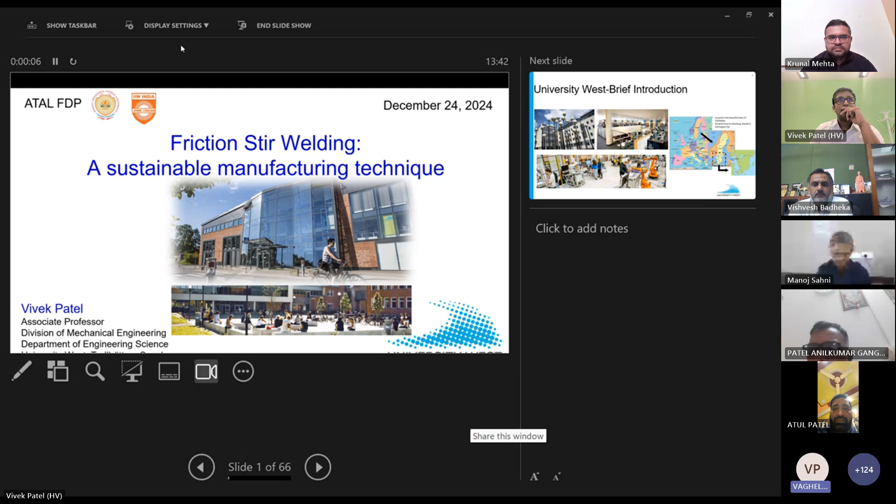Just a second. Okay, and I will share. So can you see the presentation? We can see your Teams, sir, not the presentation. Just give me a second. Now can you see my screen? Yes, sir, it's visible. I have to remove this one, right? Shall I start, sir? Please, sir. So thank you for this opportunity, and I will try to talk about friction stir welding. I think I should be talking for 1 hour, right, sir? Or what is the time limit? Yes, sir, maybe 1 hour, 15 minutes is also fine. Yes, sir, thank you.

First I will give you a brief introduction from where I come. I come from University West in Sweden, located near the second largest city of Sweden, that is Gothenburg. When it comes to education, the university deals with all cycles, starting from bachelor's, where we have programs in mechanical, automation, and industrial engineering. We also have programs at the second cycle of education, that is master's, mainly in manufacturing, welding, and robotics. For artificial intelligence and automation, these are recent programs we started in the last couple of years. We also provide PhD education, the last cycle, and do industry-driven research in our research environment.

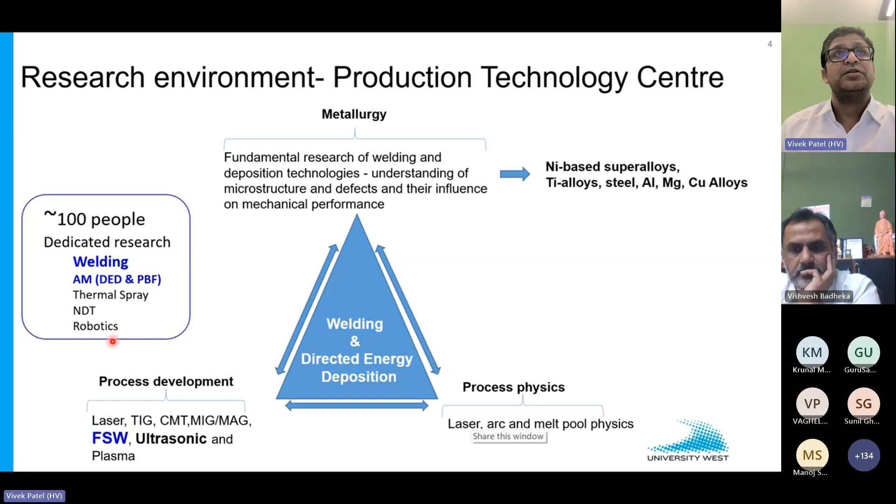In comes the division of welding from where I come. These are the infrastructure for the welding processes, and we also do in-house material testing through mechanical properties and microstructure correlations.

So that was the introduction, let's begin today's session. Before we go to friction stir welding, I'd like to start with welding basics. As you can see on the left of the screen, everyone knows what welding is. Basically, welding is joining of two or more components together. We apply a heat source to the joint where we want to combine more than one material, and several joint configurations are possible. I've put the basic joint configurations, especially for structural applications.

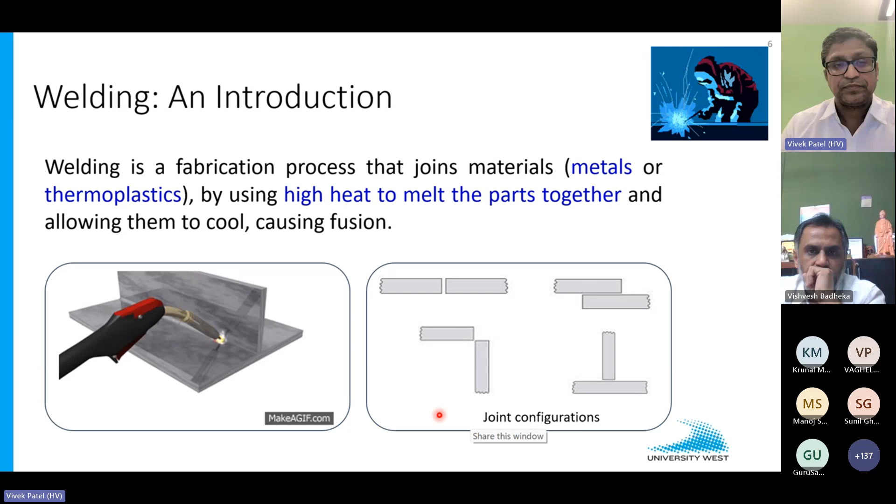You see fusion joining, that's laser welding and arc welding. In arc welding, there are a lot of applications by MIG and TIG. Then mechanical joining, so you have a lot of fasteners and rivetings. Then hybrid joining, some chemical joining, and solid state joining over here. That's what we are going to talk about today.

If we look at solid state joining, gradually the solid state welding is replacing some joining techniques in the automotive industry, and especially now the entire automotive industry is shifting toward electrification. We all know how big electric vehicles are crucial for the future, so there are a lot of applications of friction stir welding when it comes to electric vehicles, whether fully electric or hybrid. There's a significant share of friction stir welding now, and we work on process development for OEMs, meaning original equipment manufacturers.

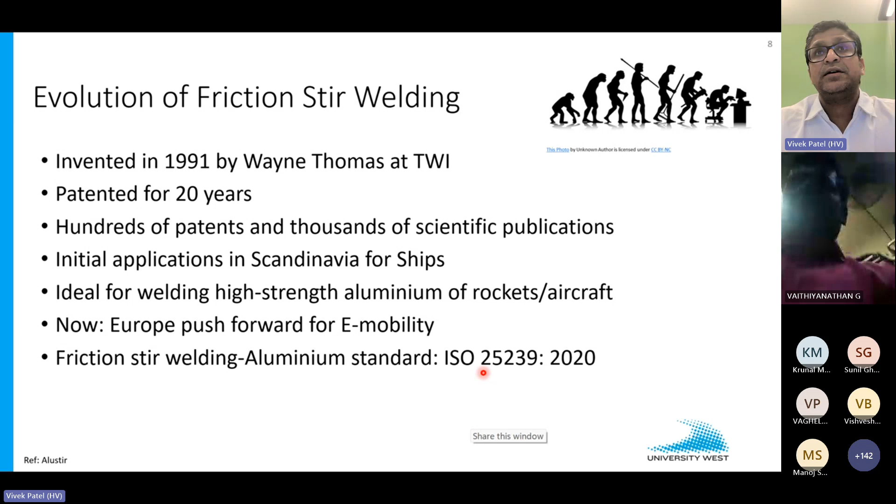But now, in the last couple of years, and for the next 5 to 10 years, there is a lot of push for friction stir welding for e-mobility, for electric vehicles. We see significant push for this technology for joining different applications in the automotive industry, and the automotive industries are willing to accept it because now the ISO standard is available when it comes to process qualification. The ISO standard was recently published with two revisions, allowing companies to implement this technology so they can qualify the process based on the ISO standard. So this is how the process has evolved so far.

Now, what is friction stir welding? The friction stir welding is a solid state process. So here there is no fusion of material. You don't melt the material basically.

So we don't see any fumes and we don't need any filler material. You don't need any shielding gas when it comes to the welding of aluminum. So basically, it's a clean process. You don't need surface preparation either.

If we categorize this welding process, it's solid state, so you work less than 90% of the melting point of the material, and the energy source is completely mechanical force. You apply a significant amount of force downward, and the force varies from material to material and from thickness to thickness of what you want to weld. The heat source or thermal source is nothing but the friction between the tool and the workpiece.

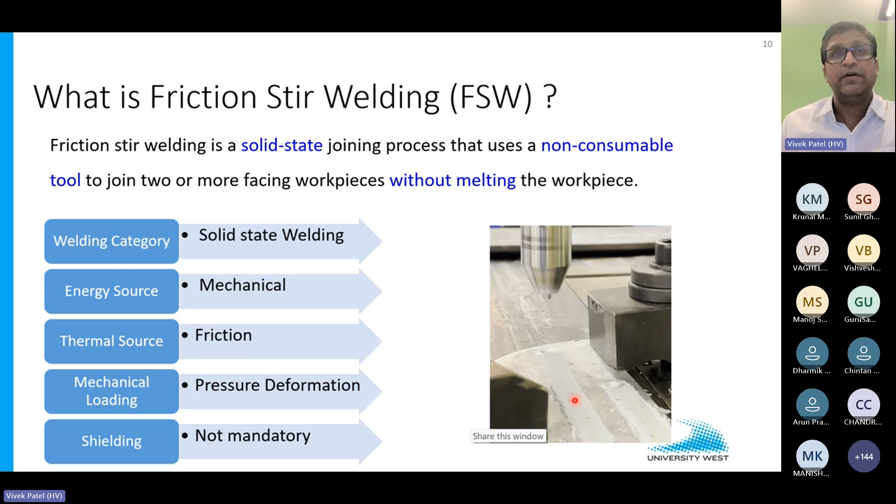The mechanical loading is the pressure applied by the tool surface, the probe and the shoulder, which we will see in the next slide. The shielding is not mandatory, especially for aluminum alloys. So I would say you save a lot of resources when it comes to mass production.

Let's try to understand with some basic illustration of the process. The friction stir welding working principle is understood through 4 steps. But before we go to the 4 steps, let's understand what you need if you want to do friction stir welding. First, you need a backing bar or significant amount of rigid support.

You can see that's nothing but the table, or the backing bar you need. The second thing is a tool, and the tool is nothing but the heart of the process. The tool has a shoulder, which is the larger diameter, and the probe, which is the smaller diameter. This tool is driven through rotational energy, clockwise or anti-clockwise, depending on the setup.

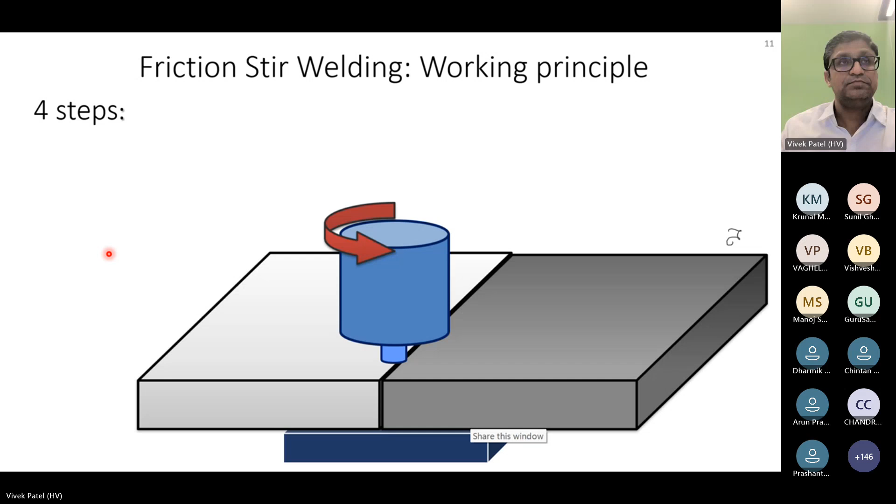This is the example of a butt joint. You have one part and a second part, and these parts are to be welded. The first step is the plunging: the tool makes contact with the workpiece and you wait a certain time. That's called dwelling, and the dwelling time depends on what temperature you want to weld.

Once the temperature is reached, you start taking the tool off in the welding direction. So the second step is welding, where the tool is moved along the welding path.

While the tool is moving, you see that this surface is developed, and this surface is nothing but the footprint of the bigger diameter of the tool, that is your shoulder. The footprint of the smaller diameter cannot be seen with the naked eye here; it is visible in the cross section of the weld.

Then the fourth step is dwelling or retracting, and you can see that you end up with a keyhole.

Now looking at the process parameters, how the process is controlled or governed: once you have the right dimension of the tool, the process temperature, or heat input, is controlled by three key parameters. The first one is rotational speed. Higher the rotation speed, more the friction, so you generate more heat.

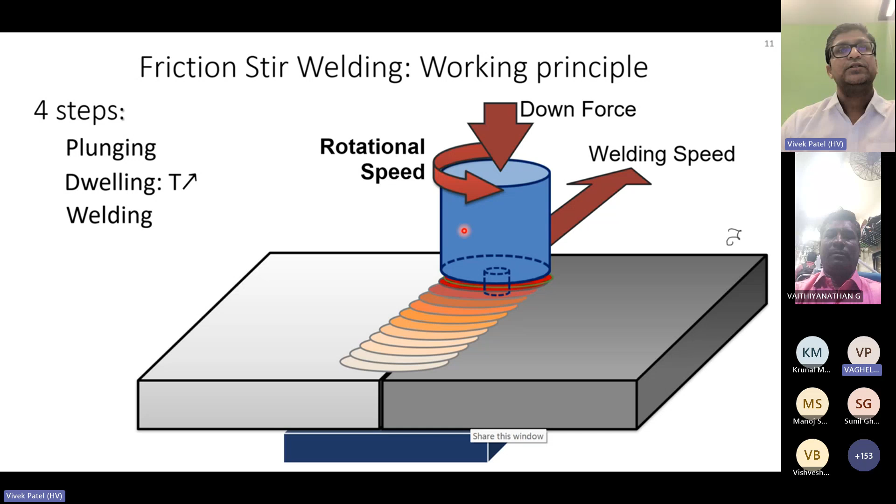The last parameter is welding speed, which provides the production volume or productivity. Welding speed is very crucial in automotive industries, where production volume counts on a fingertip 24/7. By playing with these three variables, you can decide the right weld surface and weld performance through detailed testing and characterization.

Now, next question: when it comes to material, what materials can friction stir welding weld?

So the materials that can be welded by friction stir welding - most metals can be welded, and we start with aluminum. There's significant evidence for aluminum. All aluminum alloys, from pure aluminum to the highest strength aluminum, can be welded by friction stir welding. And luckily, we have the ISO standard for aluminum friction stir welding, so there's no doubt for putting it into production and running components, whether in the lab or on road, in shipbuilding or aerospace.

Magnesium is also quite evident. We find a lot of research articles and space applications now where magnesium alloys are welded by friction stir welding. Copper, of course, is mature too. But for welding copper, the tool material plays a significant role, so you should have a different tool material when welding aluminum versus copper.

Steel and titanium, I would say, are the new topic or new materials being investigated right now in friction stir welding. These two materials are basically harder compared to the top three materials, and because of that, the tool material needs to be even harder. So there is now significant advancement on tool material for welding steel and titanium, and it looks promising. We will see friction stir welding of steel and titanium just like what is happening in aluminum and magnesium at the moment.

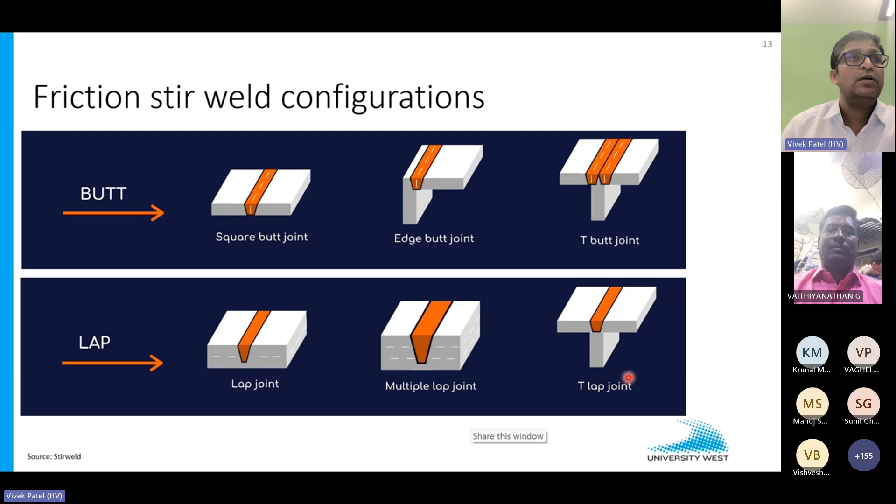And of course, nowadays, because of fixtures and tooling, T-lap joints are also possible. So it can take care of different weld configurations, which provides a lot of freedom to the designer for designing the component.

Every manufacturing process has defects - it's all about how you can tackle, minimize, and eliminate those defects. In friction stir welding, the defects you can see from the naked eye include flash on the surface - you can see in the picture, one example of flashes. This is a defect, but it can be tackled by post-welding treatment like deburring or machining, though that's not the ideal case. This defect is basically a result of a higher heat input condition, which we call a hot welding condition.

On the other side, you have some tunnel defects on the surface that you can see with the naked eye during the process - you can see this in the actual picture. This could be the result of a cold defect, or I would say cold heat input process variables.

Then there are defects you can't see from the surface that require a microscope to see from the cross section - that's a lack of penetration. You can see it here; it's quite common in the case of butt welds.

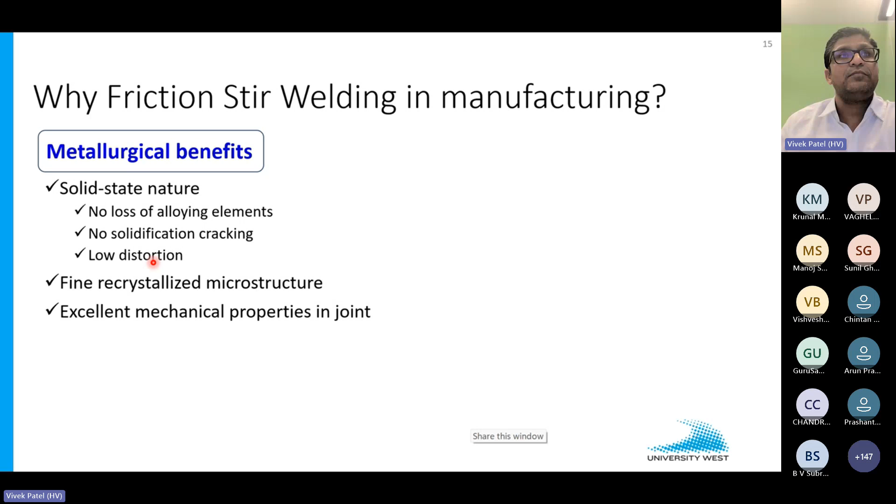There is no melting, so you get rid of solidification cracking. And due to the lower working temperature, you end up with minimum distortion. And due to the plastic deformation, you get a very fine recrystallized microstructure.

Here you can see this EBSD map of 7000 grade aluminum, 7075 T6 condition. This is the parent material, and after the weld, if you see the weld nugget, this much amount of grain refinement you can achieve. This grain refinement happens from these elongated pancake grains of rolling to fine equiaxed grains, because of the plastic deformation. There is severe plastic deformation happening during the process, and that gives you the fine structure.

This fine structure basically helps to gain some properties in the nugget, and ultimately you have a stronger joint. So that fine structure contributes to the mechanical properties. When we talk about mechanical properties at room temperature in a static way, the static tensile strength, the joint always fails either from the heat affected zone or from the parent material itself. So this process gives almost 90 to 95% of joint strength. In terms of mechanical properties, friction stir welding guarantees better strength compared to fusion joining methods.

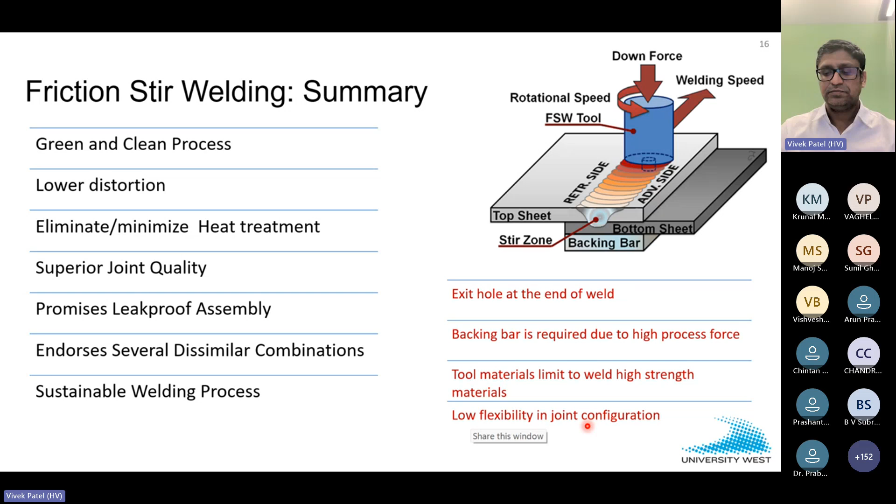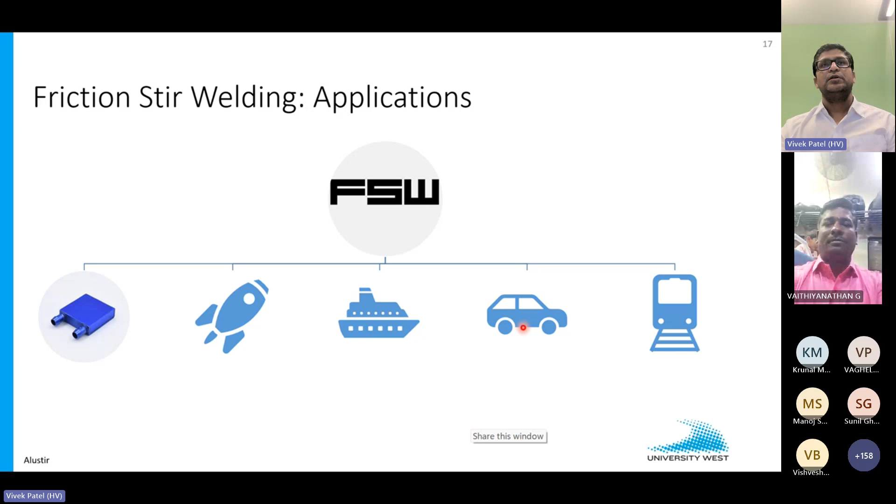So, the applications. I try to put the different applications of friction stir welding, starting from electronics, then aerospace, shipbuilding, automotives, and railway industries.

Let's start with electronics. Friction stir welding is being used for developing enclosures for circuits, especially for electric vehicles, and is quite prominent for making thermal management systems or cooling plates. You can see here some pictures of cooling plates for one electric vehicle component.

And almost 12 years ago, friction stir welding was introduced for welding the MacBook aluminum panel. That was one of the applications investigated and implemented to weld the back and front panel of a MacBook to make it more lightweight and robust.

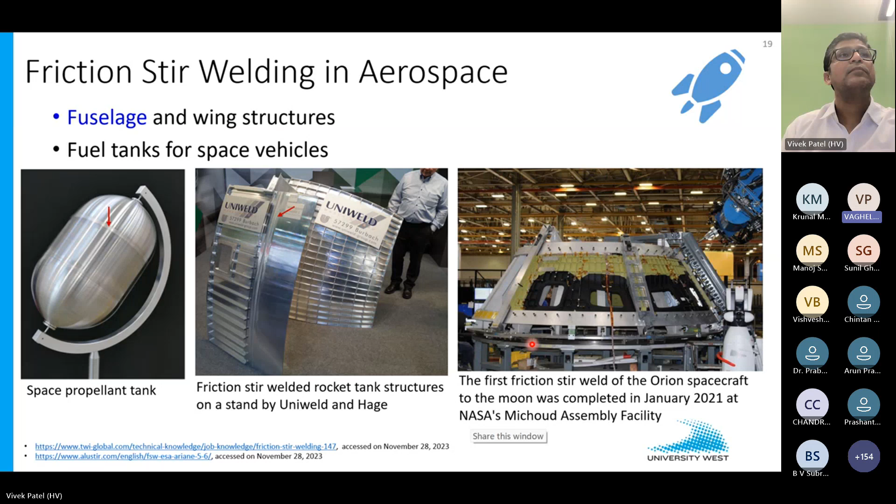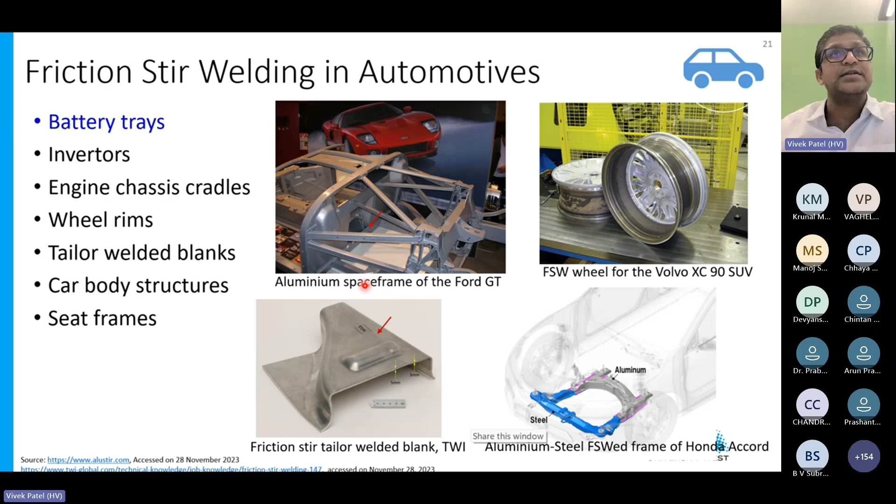Now I will try to give you more insights on friction stir welding, and I'll share some of the methods we follow at University West in terms of novelty, helping the companies nearby in Sweden.

So what we have done so far, a few PhD graduates have developed the temperature and force control robotic system. We developed a system that can be controlled through temperature. We control this process through temperature measurements, where we don't insert the thermocouple into the workpiece. Rather, one end of the thermocouple is fixed always on the back of the tool, and the other thermocouple is fixed on one of the contact points of the workpiece.

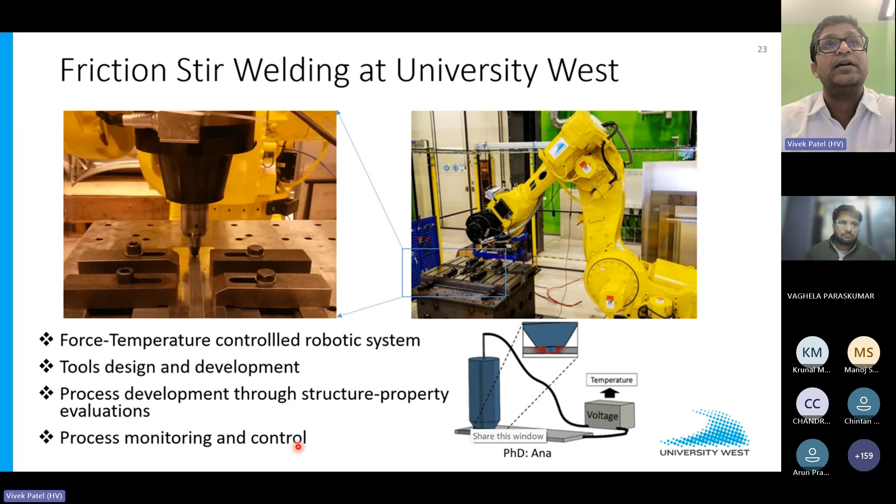And this is one of the topics we are working on right now - how to monitor and control the process in a production environment. Because monitoring and controlling in a lab environment versus production, things are quite different. So for the next few years, we are going to work on monitoring and control, and we will work more towards artificial intelligence and machine learning, so we can have better control over the process.

So I will show you our key findings, maybe for your interest. These are the 5 key findings I have mentioned, what we have done in the last 4 years.

So we try to develop a process for battery trays in electric vehicles. Then we try to figure out the battery box assembly by welding cast aluminum to wrought aluminum - we try to work on welding two different aluminums, one cast and one wrought. Then cooling plates, or I would say heat exchangers, for electronic enclosures for several applications. Then aerospace applications - we are working on fuselage structure in aerospace. And also some efforts on bimetallic joints, especially aluminum to copper for bus bars, and new applications we are targeting for heat exchangers.

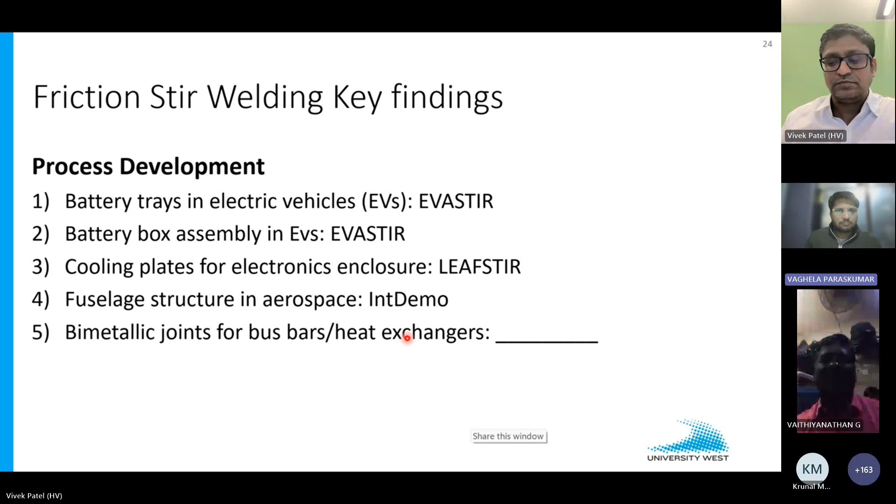So let's try to see what we have done in the first process development - battery trays. All of you must be aware of how the battery tray for an electric vehicle looks. This is basically the battery tray, the entire box, in layman's language. And this box is nothing but the engine of an electric car or electric truck. This box is filled with a lot of battery cells and battery modules. So the key challenge is how to make this battery structure leak proof and have strong joints.

So why friction stir welding? For automotive companies, it's basically a clean and green process - that's the answer for why they should go for friction stir welding. Second is leak proof - it provides a leak proof characteristic when you are welding dissimilar materials.

So let's say this frame, front end and rear end, is made of casting. And if you want to put a top cover of sheet metal, then it becomes tricky when you want to weld with fusion, maybe TIG or laser welding.

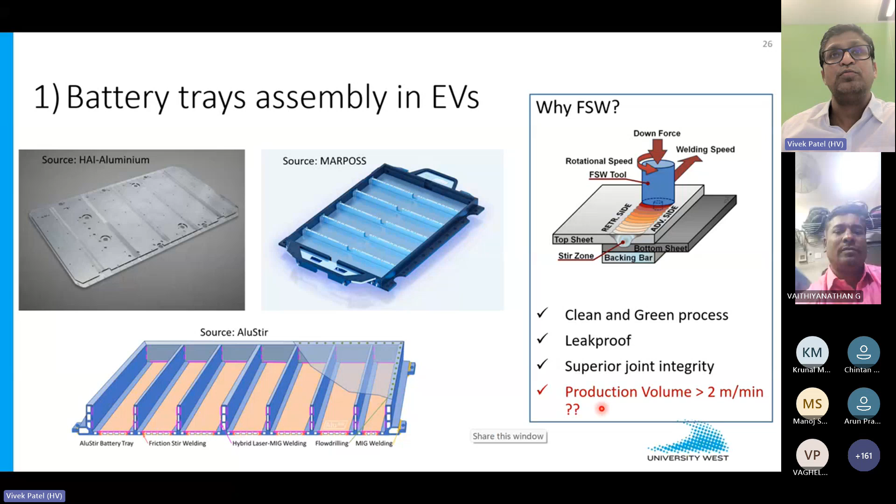Then, of course, superior joint integrity because of the solid state nature. And how about the production volume? So whether friction stir welding can be pushed to the limit of laser welding, can it approach more than 2 meters per minute, so your tool can move more than 2 meters per minute and compete with laser welding. That was the question we tried to answer during 2020 to 2022. We tried to push the limit, and in that work we formed the objective to push friction stir welding up to 5 meters per minute for extrusion aluminum alloys of 6000 grades.

And this is how the floor panel looks. These are nothing but the extrusion floor panels for cooling purpose of battery cells, and you need to weld as a butt joint when it comes to the assembly.

So in that process, we tried to work on a different tool design so that the tool can work at high welding speed, for 5 meters per minute. Because for high speed friction stir welding, the main challenge is that the tool should survive. There is a high chance that this probe, the smaller diameter, can break from the shoulder, the bigger diameter.

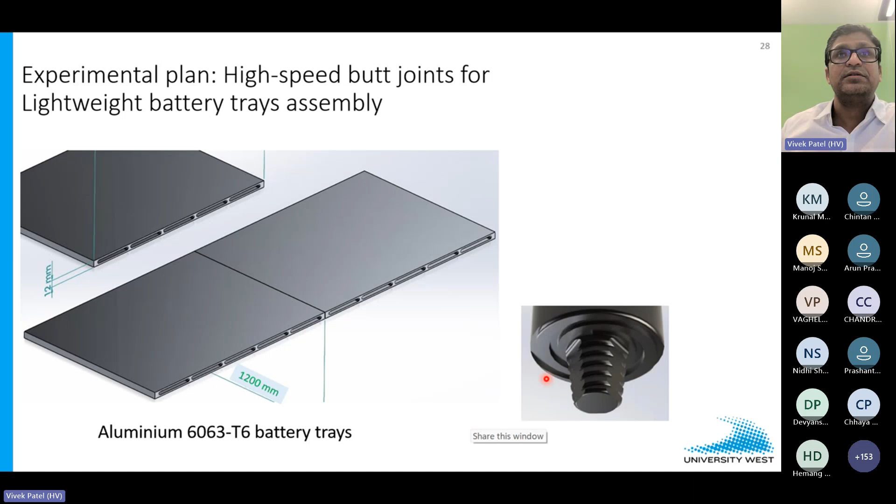We tried, and after optimizations, we found that 4 meters per minute welding speed gives a reasonably good joint, and that qualifies as per the ISO standard of friction stir welding.

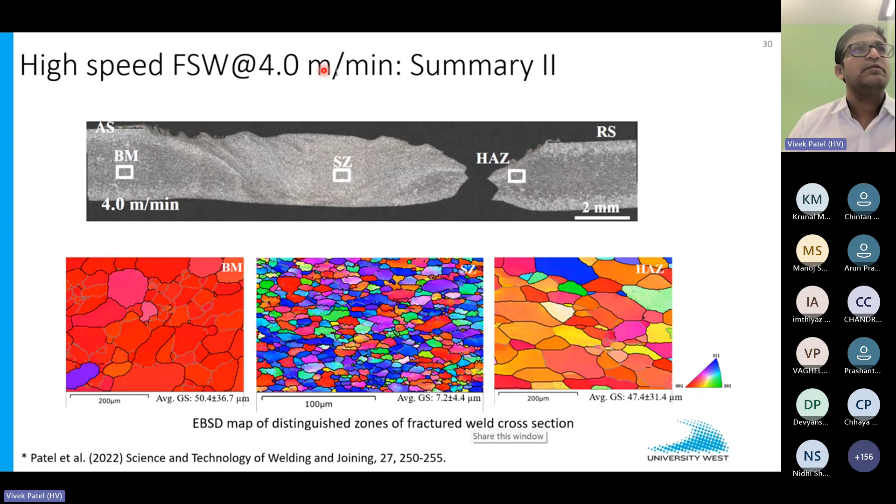So far we have pushed the limit up to 6 meters per minute, but so far we got the right properties at 4 meters per minute.

I hope you can see this video of battery floor panel welding.

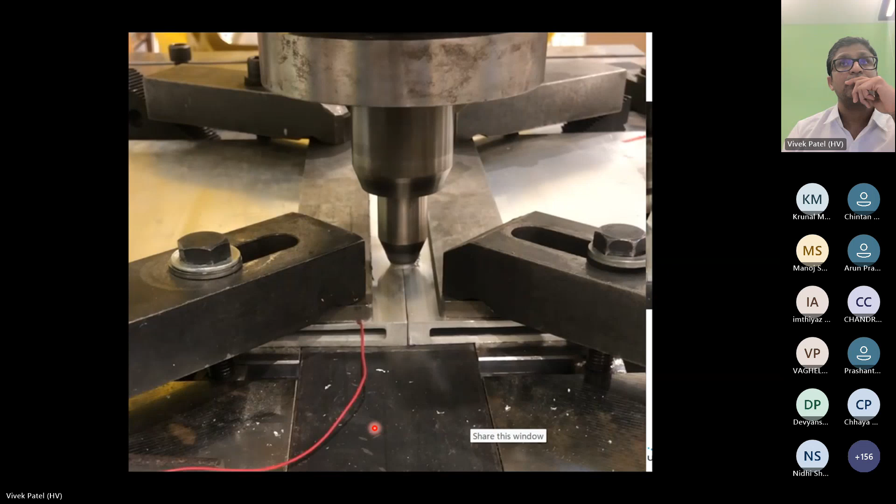But there are still several challenges for the stationary shoulder. Since only the probe is rotating, there is a lot of sticking of aluminum, and as a result, there is a very high chance that the probe gets broken during welding due to this sticking. So you need frequent cleaning, and that's quite a lot of work still to be done for stationary shoulder when we talk about production.

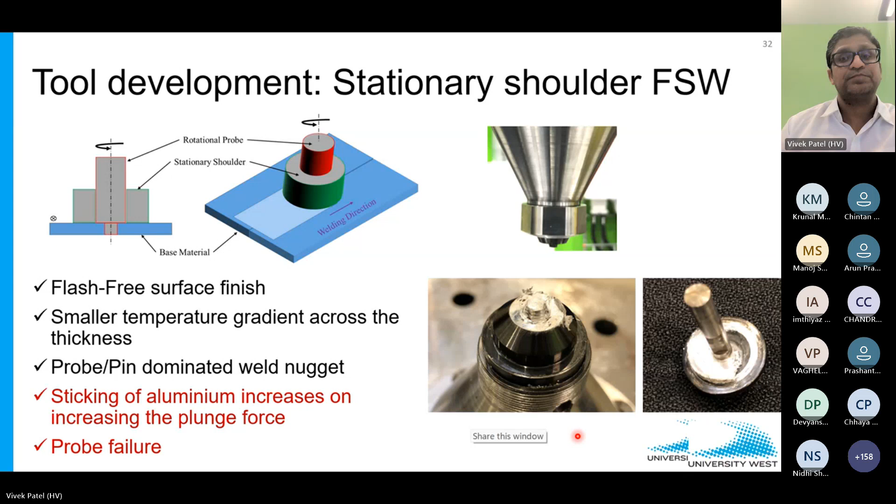But some of the demonstrators you can see, let's see if I can run this stationary shoulder video. You can see that you don't see any rotating member, because inside this stationary shoulder cover, the probe is rotating and creating the weld. This is the butt joint in front of the tool, and behind you get the clean surface.

So how it looks, you see that the butt joint surface has almost extrusion lines on the plate. And if you see the cross sections, there is no shoulder deformation on the top, so your weld nugget is completely probe dominated or probe driven. You also see the significant onion bands, a typical friction stir welding microstructure.

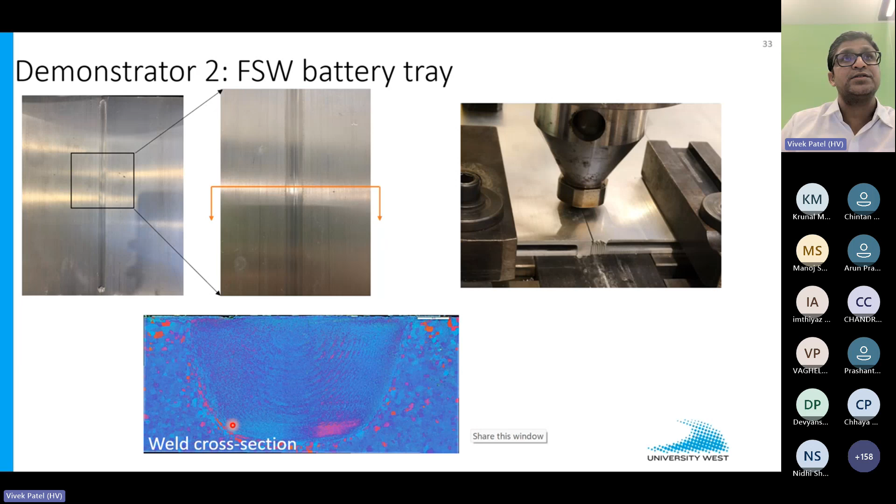Then, in order to make a strong case for why this friction stir welding, there was a small case study on sustainability where these extrusion floor panels, commonly found on all electric vehicles for cooling the battery assembly, were welded by different methods. Different welding processes were selected by different partners to analyze the sustainability and see which process stands best.

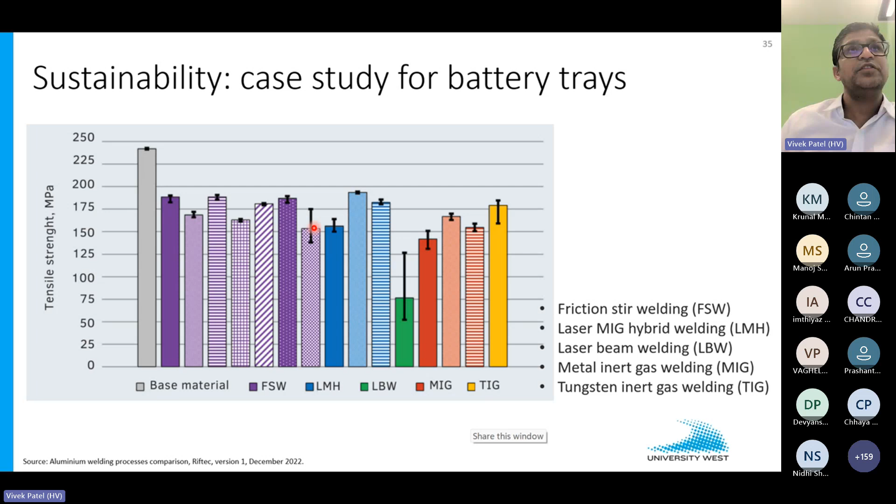So you can see some results on a base material of 6000 aluminum in T6 condition. If we see the graph of tensile strength, friction stir welding is matching to, I would say, some hybrid welding, this laser MIG hybrid welding. The other processes also show quite decent tensile strength.

Then we also tried to understand the welding speed from a sustainability perspective - how far you can push, up to 3 meters per minute was the target. You can see laser beam welding, and some of the laser MIG hybrid welding - this LMH is nothing but a combination of laser source and MIG source to make it high speed. So these three processes were competing with each other in terms of tensile strength and welding speed.

But then we tried to quantify the carbon footprint - how much carbon is emitted during the process. You can see this comparison of electricity consumption and amount of filler materials used. In friction stir welding, no filler metal, no shielding gas, and electricity consumption is quite less. So overall, the carbon footprint was found very, very less compared to the rest of the welding processes, in terms of welding speed and tensile joint strength performance.

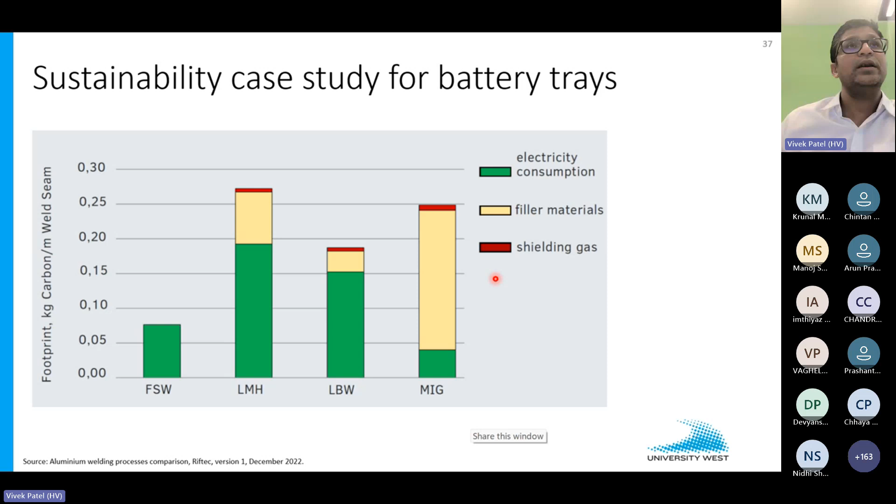So the conclusion was that friction stir welding is one of the ideal candidates that fulfills the sustainable development goals under the UN's 17 redefined goals, specifically goal number 9, 12, 13, and 17. That was a case study of why this process is more sustainable compared to other methods.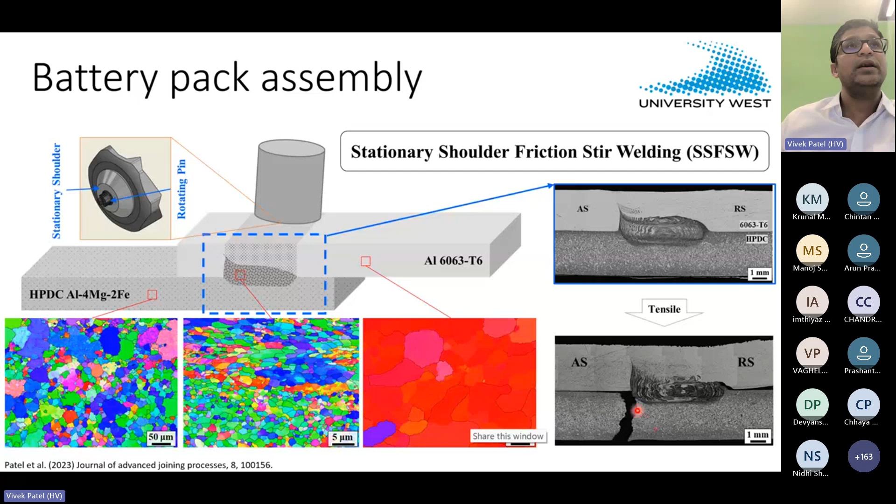When we tested after optimizing process parameters, in tensile testing you see that the weld was trying to open from the advancing side - a typical cold lap feature of lap joints in friction stir welding. But ultimately, the final failure happened near the hook side of the cast material, as expected.

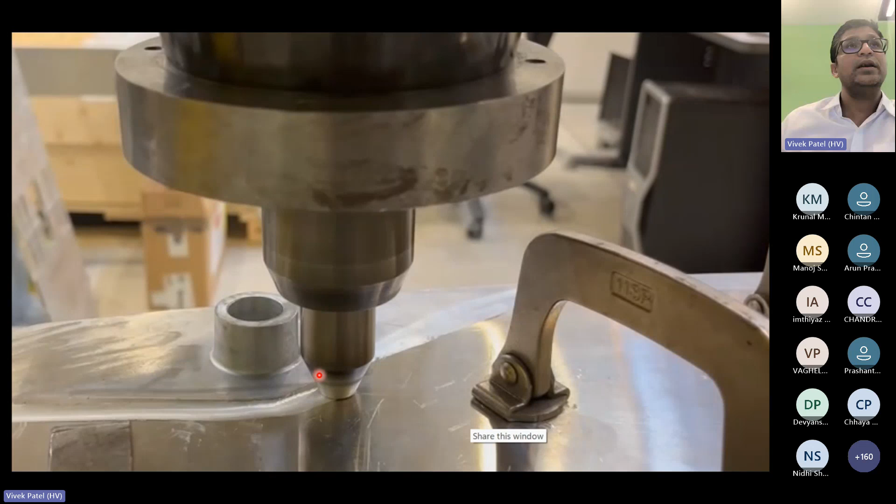And then some videos you can see how close we are welding. Here on the top you have the extruded material, and this is a cast component. Here we are welding very near to the edge in two dimensions.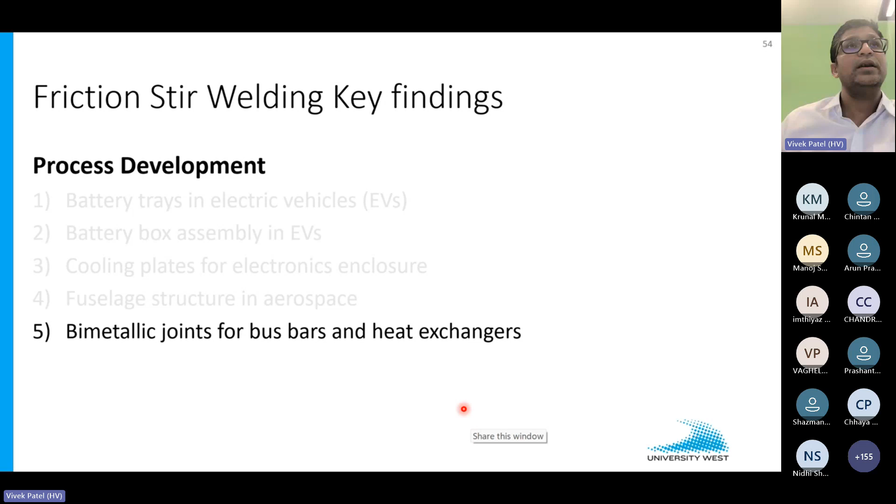Then the last applications for bimetallic. So this is a new activity we are doing now, and we are trying to weld aluminum on the top and copper on the bottom. That's a typical application.

One of the cross sections we can see here: on the top you have the aluminum, bottom is copper, and we designed our own tool so that tool can effectively work on the copper side than the aluminum side, because it's always tricky to mix the copper with the aluminum due to difference in melting point and of course the properties. So here you have a lot of intermetallics as expected, and we try to monitor the hardness at different intermetallics and understand how this intermetallics becomes hard.

So we found around 175 HV, in some cases 200 HV hardness, against 95 HV of aluminum and copper. So it's a very, very brittle intermetallic, and these intermetallics are detrimental to the joint performance.

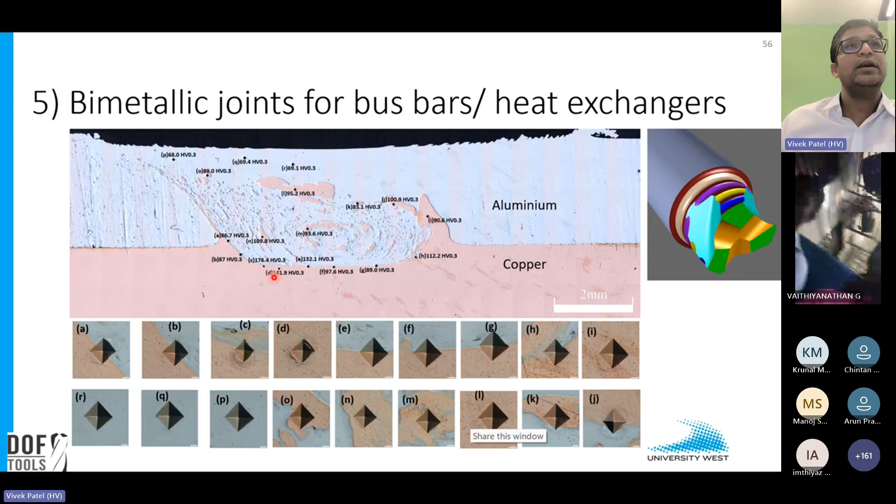And also you have a lot of challenges when you are transferring electric current out of those joints, so it creates a lot of obstacle to the electricity. So the next task is to minimize the intermetallics and to correlate with the electric resistance at the joint interface.

Then in the last stage of my presentation, I will show some ongoing developments and what research questions are worth pursuing in friction stir welding. So the first one is hard materials.

Friction stir welding of hard alloys like steel, titanium, and nickel-based materials. These three categories of materials are quite new, and for that there is a new tool development needed. You need a very hard tool material, and not only hard tool material, but also you need to process and machine down to small features on the probe and the shoulder. So a lot of research is happening there.

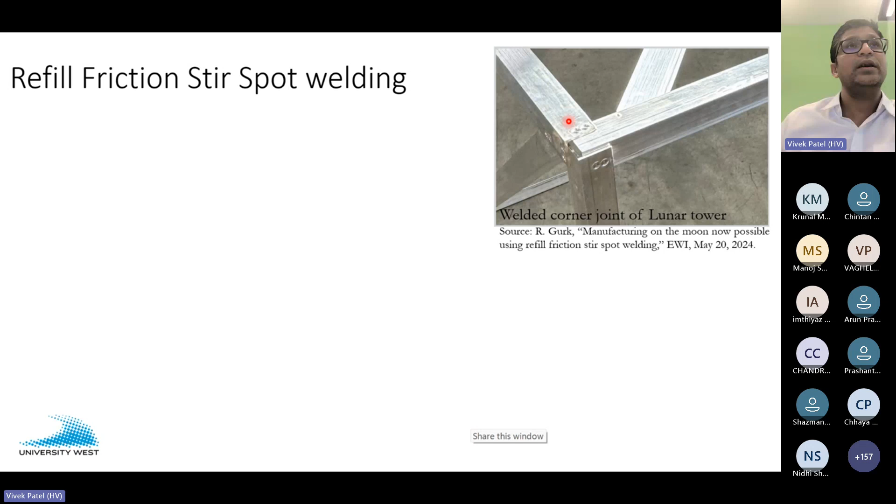So how does refill spot weld work? Rather than linear welding, you have spots here. Let me see if I can run this video.

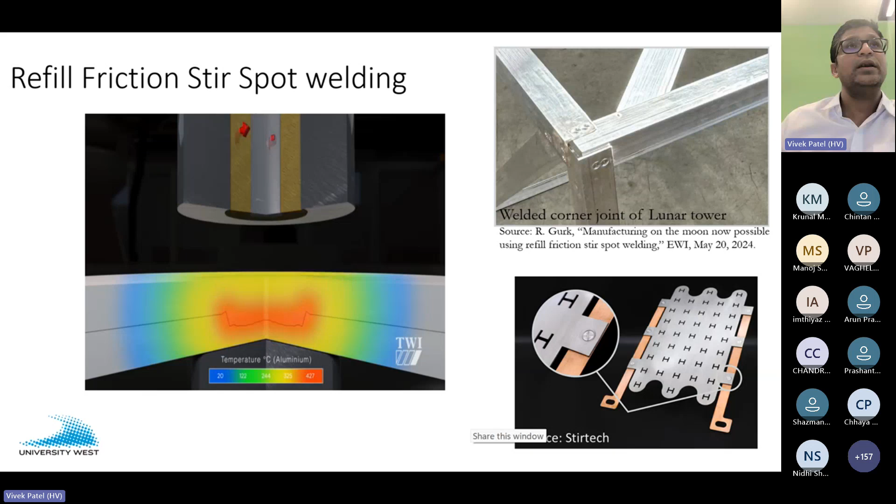You can see there is a spot welder on a robotic arm with a different tooling arrangement. In this tooling arrangement, the probe comes first, but there is another sleeve which makes the spot. When the tool comes out, you don't have a keyhole.

So I would say it's a new development, ideal for replacing riveted joints or resistance spot welds, with applications for bimetallic joints like aluminum to copper. You can see some spots for automotive and electric connections.

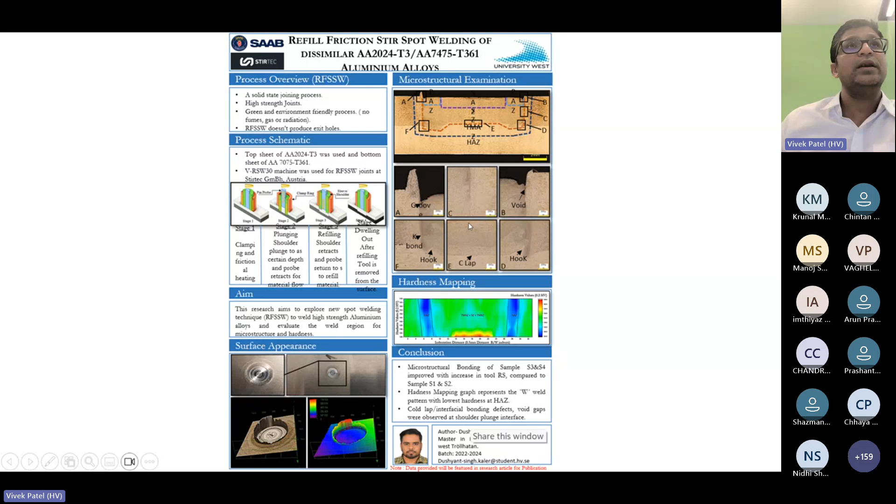That's one of the projects we have started, working with 2000 and 7000 series aluminum by refill spot weld, in collaboration with Stirtec, an Austrian company. You can see how the spot weld looks—there is no keyhole at all. We are trying to develop understanding of different defects and what's happening in the microstructure.

Then some new projects: friction stir welding can be a substitute for TIG welding for several applications in joining aluminum, especially for energy applications.

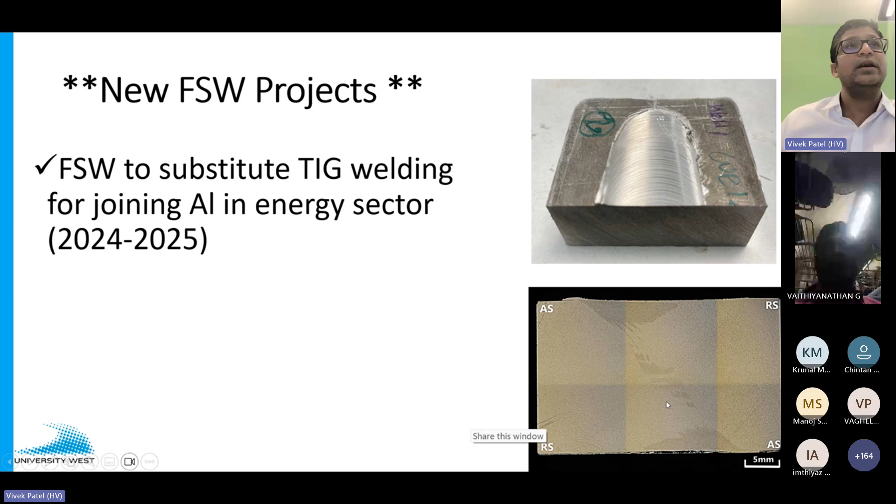We have been welding this 25 millimeter thick block, welded in two directions—one welding pass on one side, and another welding pass on the other side—and we have completely defect-free welds of thick blocks for energy applications.

Then the new topic is how to ensure there is good quality of the weld surface. That's what we are working on, and it's an interesting topic for all manufacturing processes, especially welding and additive manufacturing: process monitoring and control—how we can develop a tool which can tell you whether the process is correct or not.

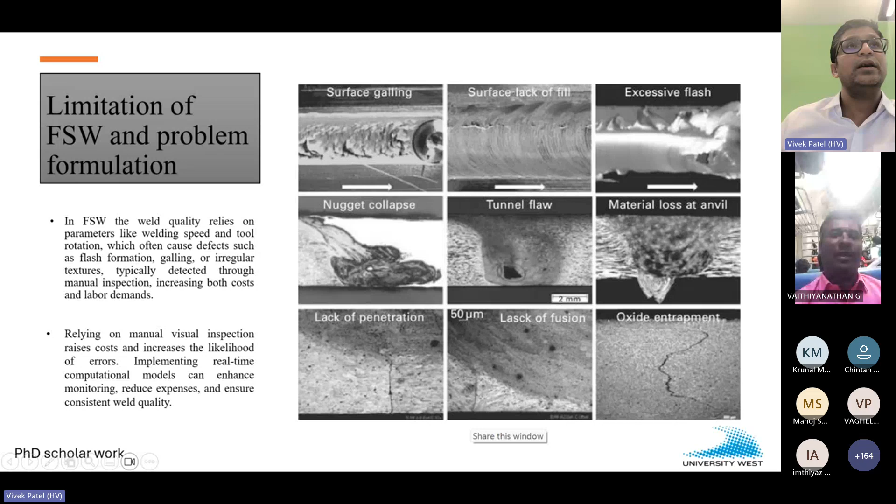So we are trying to work on this defects capturing through online monitoring tool system. And for that, we have planned that one of the PhD graduates is working on this topic, how we can monitor and control the process through applied machine learning, deep learning models, and control the process by looking at the surface.

So here our idea is to quantify the process or classify the surface, and those classifications can be related to the subsurface defects, and that can give you the idea about the quality of the welds in a production environment.

So it's like monitoring and control, because monitoring is very much established, not only in friction stir welding but a lot of additive manufacturing, but how to control is the question. Controlling needs a lot of effort from different research organizations and companies, and then we can have some solutions to control the process online, not offline.

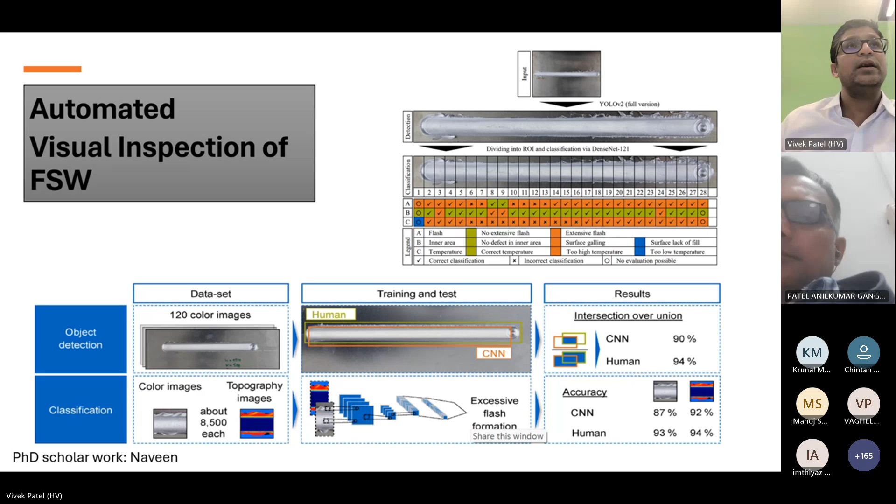So that's it, I think I should stop now.

Thank you, sir, for the wonderful talk. It was really enriching for us to hear you.

Sir, can we take a few questions? There are certain questions in the chat box. Can I read them? Yes, yes, please.

Most welcome. Sir, the first question says, what advantages does FSW offer over traditional welding techniques in EV battery packs? Does it contribute to lightweighting of the structure?

Yes, just give me a second. I will stop sharing. Is that okay now, screen? Yes, sir, yes, sir.

So for the first question, the first answer is low distortion. Distortion is quite less because the cooling plates are made of aluminum. When you weld with TIG, MIG, or laser, then you have a lot of distortion. The second answer is that it saves a lot of money actually, so it's more sustainable than the rest of the welding processes. Of course, capital investment is higher, but once the process is established, it's more sustainable compared to the rest of the welding process.

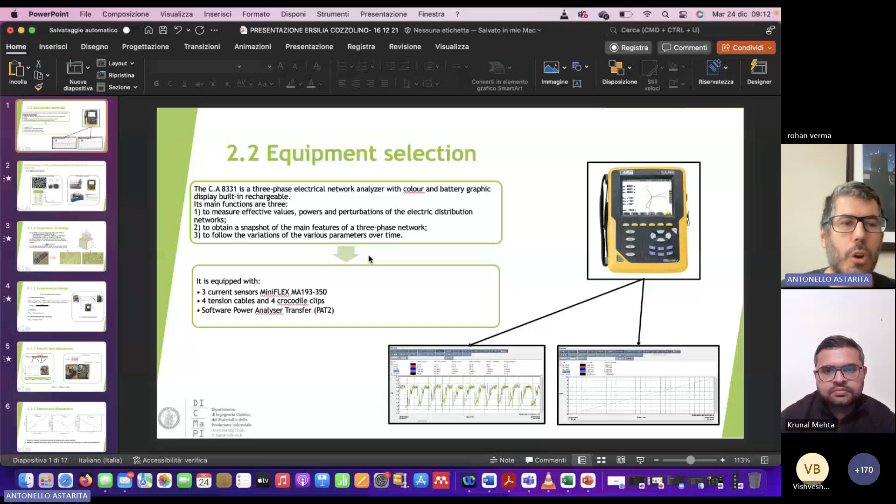Okay, I guess you can see my screen. This is work we did in collaboration with an Italian company. We started from Inconel 718 powders - this is the alloy most used for space applications - and we used a concept laser machine and then a machining center, a CNC turning machine.

We measured the energy consumption of all the different stages of the process. We varied the process parameters to find the correlation between the parameters and the energy consumption, because this is another point: beyond measuring the energy consumption in 3D printing and machining operations, the most important thing is to reduce this energy consumption. How? You can find that by varying the process parameters accordingly, you can achieve conditions where the energy consumption is lower. So another point we are going to study is changing the process conditions to achieve the lowest possible energy consumption.

So we started from those powders and manufactured some samples, cylinders - a very simple geometry to use as reference to measure the specific energy consumption. We printed many samples by varying the laser power, the scanning speed, and the hatch spacing. We did 27 different combinations of processing parameters, and calculated the theoretical energy density for each condition. This is a common formula used in 3D printing to calculate the theoretical energy density.

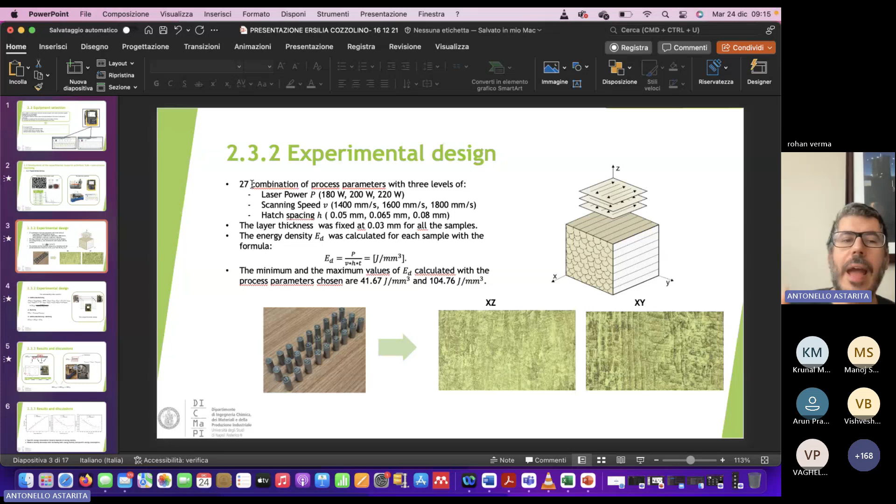So we did this 27 combination, and after the 3D printing process, we did machining on all of those samples to couple the energy consumed during machining and the energy consumed during the 3D printing.

So how do we measure the specific energy consumed for additive manufacturing? The first important point is to measure the energy, so we use this device. This is just a power analyzer that we put between the machine and the socket in the wall. You have to be very careful in designing this kind of equipment, and also the intermediate stuff you put inside to measure the energy required from the machine. This is a three-phase equipment, with 3 lines and the neutral line. This equipment allows you to measure the energy required during the process.

Once you measure the energy, you can calculate the specific energy consumption for additive manufacturing. In a first instance, this specific energy consumption is the ratio between the energy required for the whole build versus the mass of the samples you printed.

But you can also write that the energy required to obtain the build equals the energy required by the laser plus the energy required by the auxiliary systems, because you have a circulating gas pump, a vacuum pump, or other auxiliary machines. So you can divide the energy spent for the whole build into the energy required by the laser, which is related to the process parameters, and the energy required by the auxiliary systems, which sometimes is only related to the processing time.

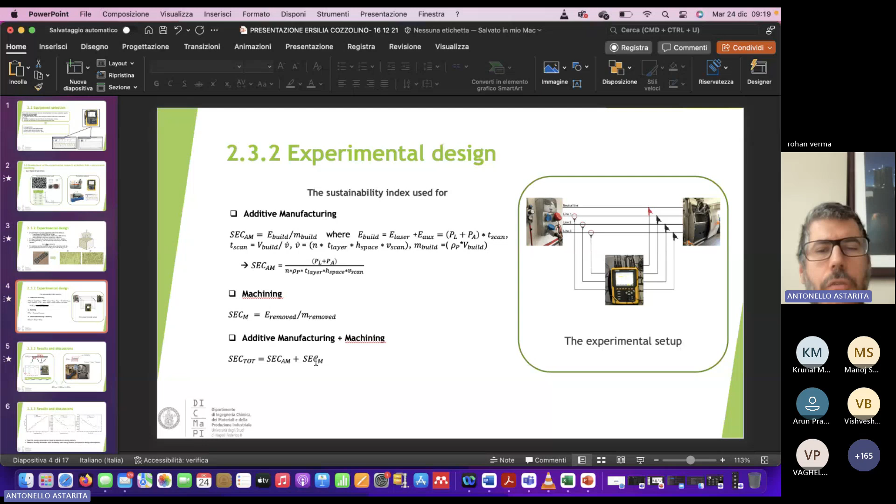So if you want to calculate the total specific energy consumption related to the product, you have to add the specific energy consumption of additive manufacturing plus the specific energy consumption of machining, coupling those two formulas. This is what we did in our paper. In our activity, we measured both quantities, so in this formula we don't have the theoretical calculation, but the actual calculation, because we performed experiments and measured the energy consumption.

For instance, during the production period, you have the period in which the laser is working, with very high power consumption, but then you have the period in which the laser is shut down, where the power consumption drops. You have the first layer, then the laser operates, then the second layer, then the laser operates, and so on. So during the process, you have some time in which the laser is operating and some other time in which it is not operating.

Then we performed the machining operation to achieve the surface finishing required for space application, and we were able to calculate the total specific energy consumption. One question should be, why did we use a lathe machine and not a CNC machine? Because in this activity, we want to focus our attention on the contact between the cutting tool and the sample. A CNC machine has a lot of auxiliary systems, so studying the energy required for the actual cutting process would also require considering the influence of those auxiliary systems. Aiming to focus attention on the interaction between the cutting tool and the material, we decided to use this lathe machine, which has a very low number of auxiliary systems. At the end, we found a direct link between the specific energy consumption in additive manufacturing and the energy density.

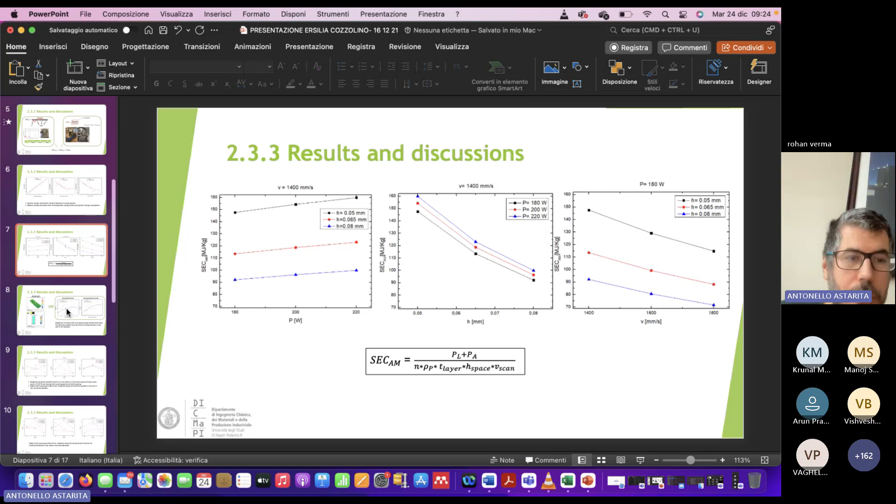Then we also measured the surface roughness to correlate the specific energy consumption to the roughness, because in the previous slides we correlated the specific energy consumption to the density of the 3D printed parts. But as I said, when you perform post-building treatment, you also want to reduce as much as possible the surface roughness of the parts, so you need to measure roughness before and after the machining process. We used a three-dimensional scanner to get the 3D representation of the surface and calculate, according to the standard, the surface parameters for roughness, because usually you calculate linear parameters for roughness, but in 3D printing the linear parameters are not detailed enough to capture the actual shape and geometry of your surface. The parameters more useful to capture the surface are the surface parameters. We used a Leica DCM 3D confocal scanner to acquire the surfaces and calculate the surface roughness according to this standard.

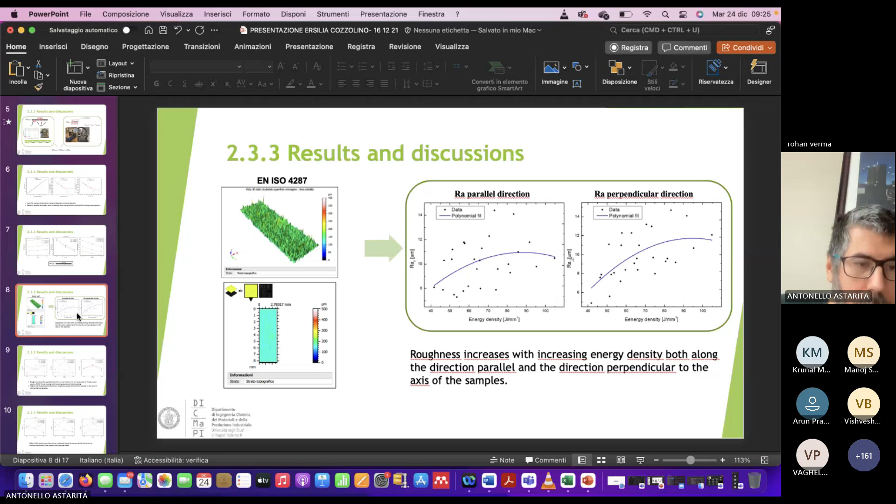The results we obtained were varied. We can see that there is no clear relation between the 3D printing process parameters and the roughness parameters, but this is not a big problem because we are going to do machining.

We performed a machining operation and found that most of the energy is consumed by additive manufacturing. As you can see, when you look at the specific energy consumption.

Maybe there is someone with the open microphone.

Okay, fixed. So as you can see, when you calculate the total specific energy consumption, most of the energy is consumed by additive manufacturing, but in machining operation, here we are only considering surface finishing, so we are removing a very small part of material, so the energy consumption is limited with respect to the energy consumption of 3D printing.

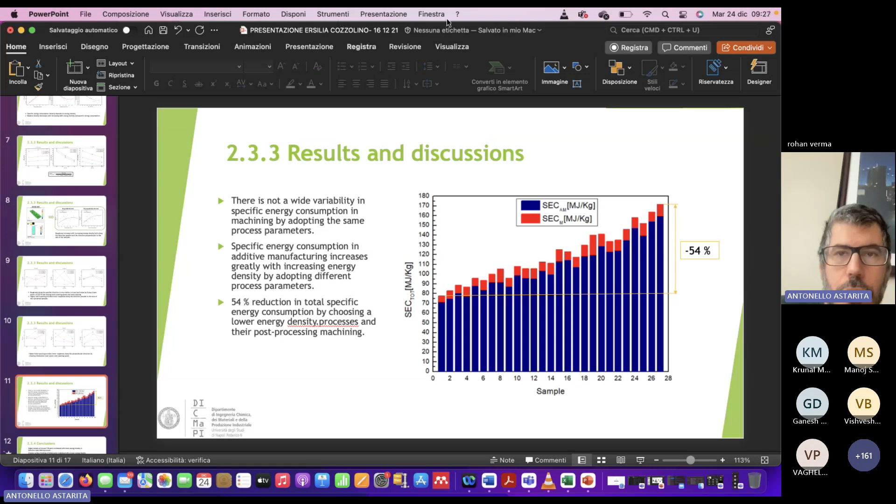It's because it's just a kind of finishing process. Another important point I want to share with you—we are going to change the presentation—is that there are differences between the environmental impact of additive manufacturing and the environmental impact of machining. Why? Because in machining you have waste of material, since you are producing scraps and so on.

Okay, I will try to manage it. Thanks for the suggestion.

So the point is that in additive manufacturing you spend much more energy, but the use of material is more efficient. In machining, the energy required is lower, but you are wasting material by producing scraps and so on.

So in this particular case, where we are performing just a surface finishing to reduce the surface roughness of 3D printed parts, most of the impact is related to the 3D printing process. But if you focus on a machined part, you will see that most of the impact is related to the machining process.

And again, in machining operations, the use of lubricant is very important. Why? Because in the past, and still nowadays, most industrial applications have a very high use of lubricant, and the lubricant is responsible for most of the environmental impacts. We have to try to reduce the use of lubricant.

You will see in a next presentation how the use of lubricant affects the sustainability of the process.

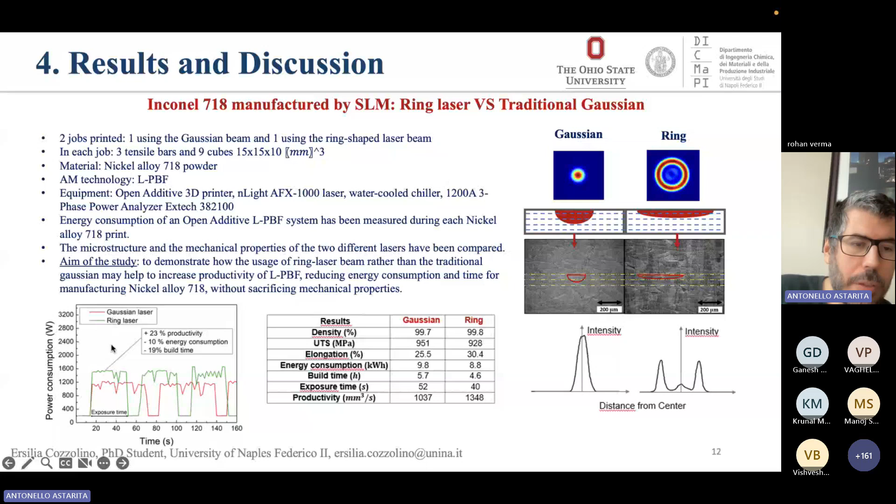Again, we performed a full experimental campaign and measured the power consumption over time for both processes, Gaussian laser and ring laser. By using ring laser, we were able to improve productivity and reduce both energy consumption and build time.

As you can see, each time you reduce the build time, you increase productivity and decrease energy consumption. Why? Because if you remember the previous formula for specific energy consumption in additive manufacturing, by reducing the process time, you reduce the energy consumed.

Why? Because you are reducing the operating time of the laser, but what is more, you are also reducing the operating time of the auxiliary system. And for a 3D printing facility, the auxiliary systems are more important.

Again, in real industrial applications, when you consider the auxiliary machines, you should also consider the air conditioning of the room in which the operations are carried out. We are conducting a study with an Italian company, trying to measure the energy required to keep the printing condition in the room effectively used for the printing operation.

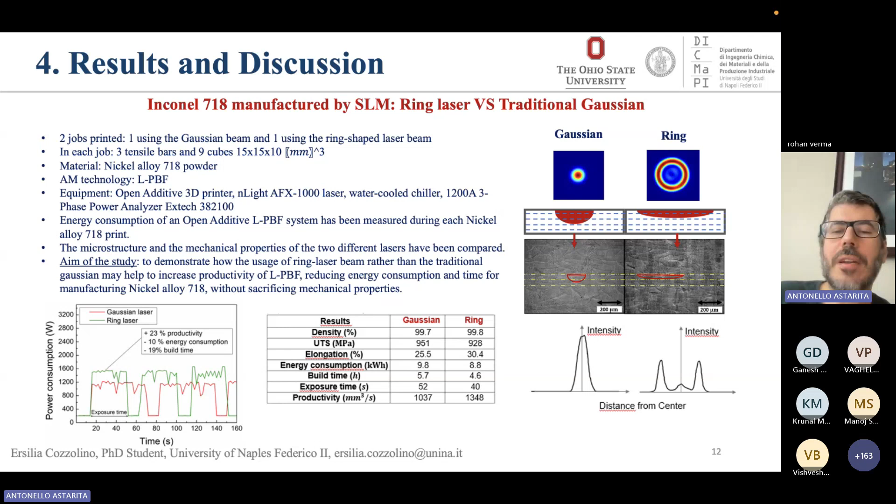We can see that reducing the processing time will lead to a dramatic reduction of the energy consumption, because you also save the energy required to keep on, for instance, the air conditioning in the room in which the printer is operated.

We did a more detailed study for electron beam melting, carried out in collaboration with CIRA, the Italian Center for Aerospace Research. We are doing different experiments with different printers and partners, trying to validate our formula in the most general manner possible, using data from different processes and printers to find a clear correlation.

In this work, we studied titanium 6 aluminum 4 vanadium, which is an alloy mostly used for space and aerospace applications, and we used an electron beam melting machine.

As you may know, the main difference between selective laser melting and electron beam melting is that in selective laser melting, the power source is a laser. In electron beam melting, the power source is an electron beam.

In electron beam melting, you can have a higher layer thickness and higher productivity, but you need to keep the building chamber under vacuum condition, which is usually much more expensive than gas, and you need to keep the whole printer job at a preheating temperature for titanium of more than 700 degrees. This is important because when calculating the sustainability of the process, this preheating temperature has a non-negligible effect.

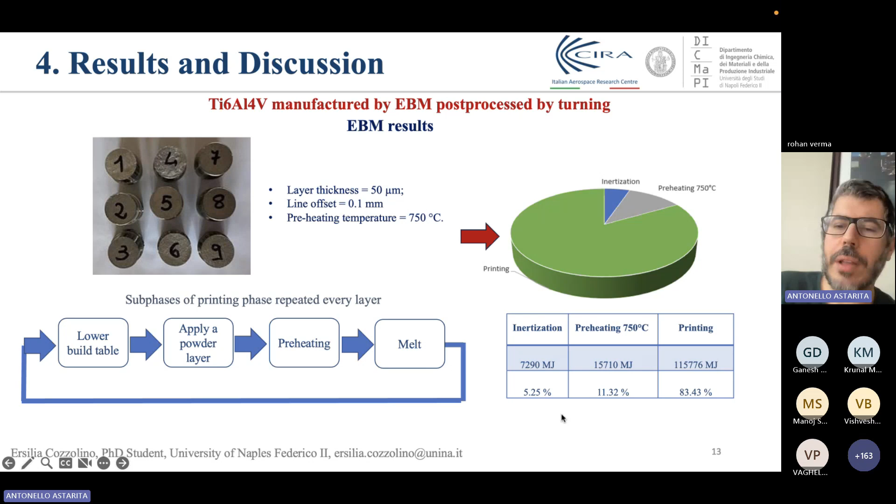In this pie chart, you can see the use of energy for the different stages of the process. Most of the energy is required for printing, but there's a non-negligible part due to preheating of the whole job, and another non-negligible part related to inertization. This is the flow chart of the process, and we measured the amount of energy required for each step.

Again, we did machining operations after the 3D printing. You can see here the sample printed through EBM. We did the machining operation using a conventional lathe, again trying to reduce the use of auxiliary systems in machining.

We obtained an equation to calculate the power actually required to perform machining operations, because our aim, as previously said, is to produce a formula that you can use to predict the energy required to perform both 3D printing and machining processes to obtain final parts.

We performed machining operations under different conditions. The spindle speed varied from 440 revolutions per minute to 1200 revolutions per minute. We also varied the depth of cut, and we used Sandvik Coromant tools with an industrial lubricant, so state-of-the-art tools with the lubricant most used in industrial environments, at least in Italy.

We carried out a full experimental campaign by varying the cutting process parameters, trying to develop this equation that allows you to calculate the total energy required to perform a machining operation.

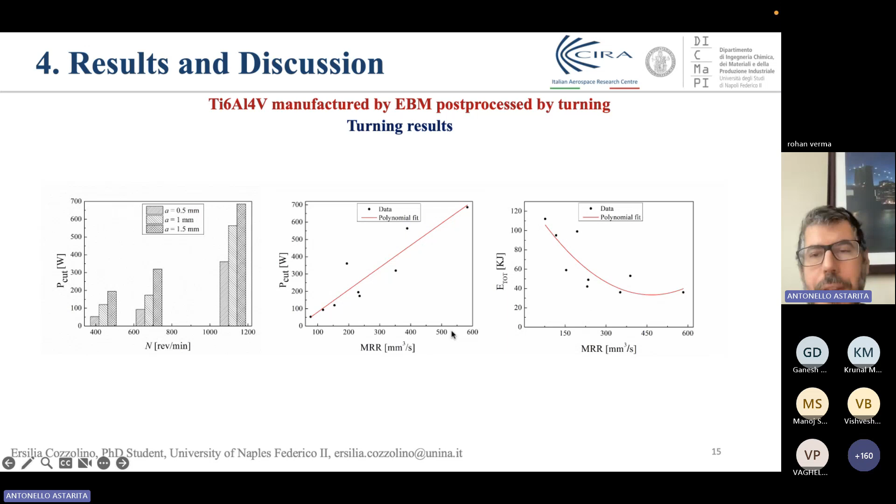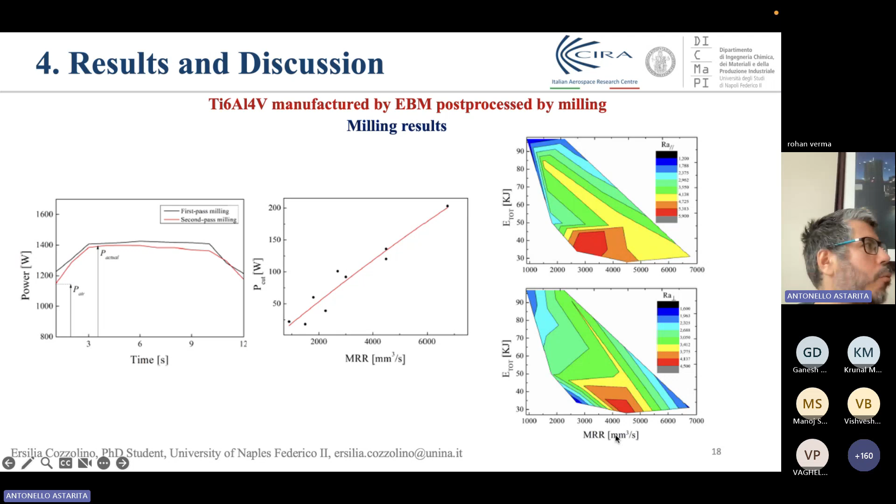This is very useful for industrial application in the aim to achieve sustainable manufacturing, because by respecting the roughness limits you have for your given application, you can choose the total energy and the material removal rate that allows you to achieve this point.

And let me change... sorry for the laptop... it's not... this is not... okay, yes.

Another interesting application we are carrying out is the correlation between lubricant use and the life cycle impact assessment of the part. Which is the correlation between the use of lubricant and the life cycle impact assessment of the part?

The problem in using lubricant is that you have to dispose of the lubricant after the process. Disposing of the lubricant is much more impacting than producing the lubricant itself. So you have to manage between two different phenomena: tool wear and the use of lubricant.

Let's focus our attention on machining of titanium, as we did in the industrial case I just showed you. As I just said, in machining you have two different aspects: you can either use lubricant or not use lubricant.

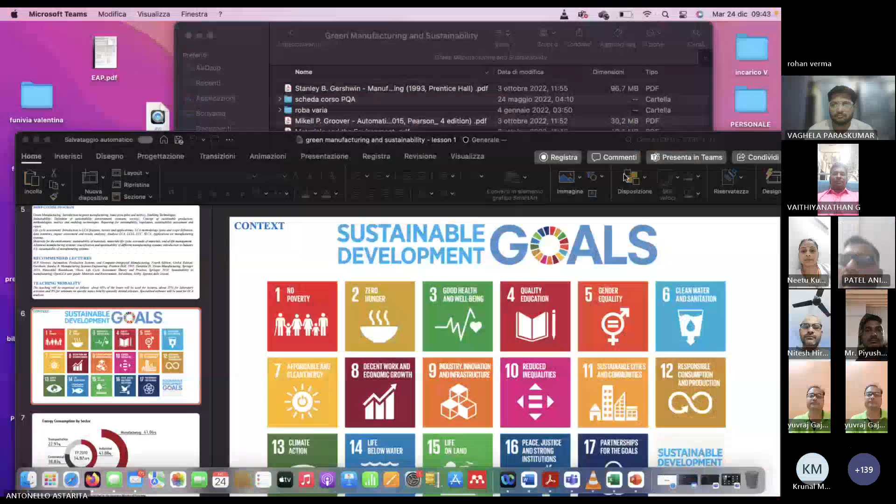As you can see here, we have the Sustainable Development Goals set by the United Nations Organization. To achieve sustainable development, we have some goals. As industrial people, we have to focus our attention on industry, innovation, infrastructures, sustainable cities and communities, and decent work and economic growth. Our goal as manufacturing engineers must be to reduce the impact of manufacturing operations by introducing new applications, like the ring laser in additive manufacturing, and developing new equations, like those we're developing to calculate the energy required for machining and 3D printing, trying to minimize the environmental impact of manufacturing goods.

Here we can see this data coming from the Japanese Ministry of Economy, but it's a kind of global study. We can see the energy consumption by sector, and we can see that most of the energy consumed is consumed by manufacturing. So as people working in manufacturing, we have to focus our attention on this fact.

But we also have energy directly consumed by manufacturing, and also energy that is indirectly consumed by manufacturing. If you look at this transportation amount, we can assume that part of this transportation is used to transport goods which are manufactured. So the energy consumed for manufacturing is even higher.

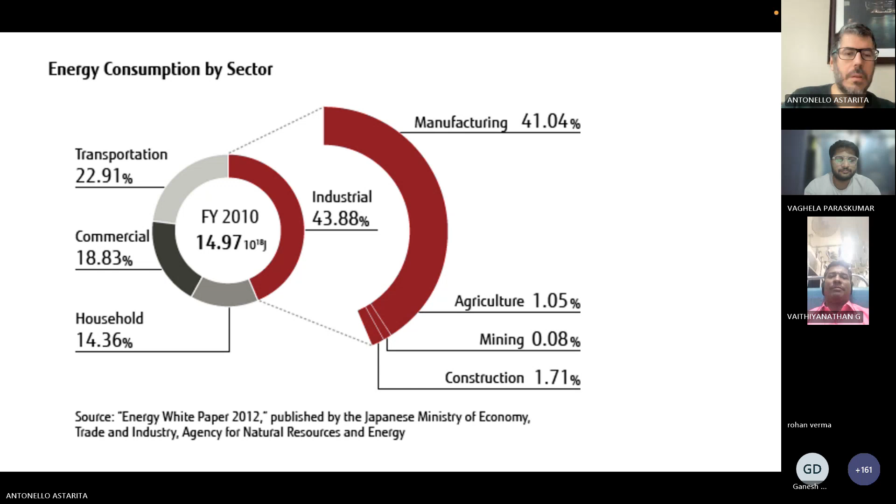We can see more or less the same results, but made for China, aiming to compare the footprint of different countries. Again, we can see that most of the energy is consumed for manufacturing operations.

As I showed you in the previous part of this talk, a very important point in manufacturing operations is energy consumption, because most of the energy that the world consumes is consumed by manufacturing. So as manufacturing engineers, we have the responsibility to study the energy consumption related to 3D printing, machining, and all the manufacturing operations that we carry out.

Also, most of the CO2 emissions are related to manufacturing. As you can see by these diagrams, most of the CO2 emissions are embodied in manufactured products. What does it mean, CO2 embodied emission?

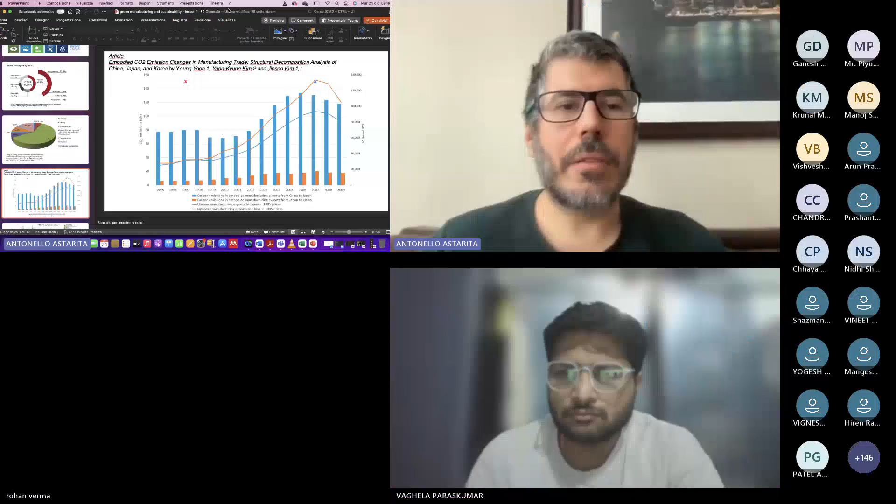We have to be familiar with the concept of embodied energy. Each manufacturing good, each product that we have, has an amount of embodied energy. What is this embodied energy? It's the amount of energy that has been spent to produce this part, to produce this good. So at the end of the production path, we have an amount of energy that has been spent to produce this part. This amount of energy is called embodied energy.

We also have emissions related to the manufacturing of this good. So a particular product, a particular good, has a kind of embodied CO2 emission. As we can see, most of the embodied CO2 emission is related to the manufacturing steps, and most of the embodied energy is related to the manufacturing step.

This is the reason why we focused our attention, as I showed you in the previous part of this talk, on measuring energy consumption and on providing equations to predict energy consumption, because the energy consumption and embodied energy of a particular product immediately give you a kind of index of sustainability of this part. The lower the embodied energy, the lower the embodied CO2 emission, the higher the sustainability of the part you are producing.

Let's go back to the presentation. As you can see here, in a first period...

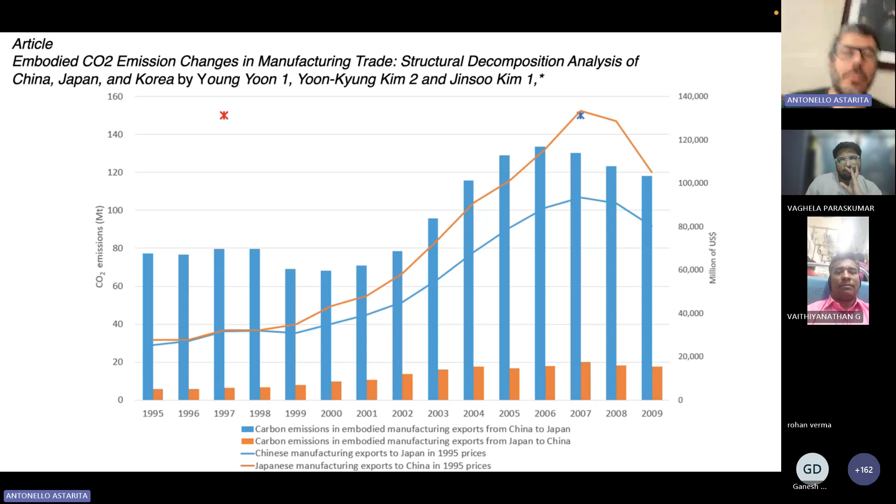As you can see here, in a first period, the carbon emissions were continuously increasing. From the first decade of this century, we are decreasing CO2 emissions. Why? Because we are trying to focus our attention on more sustainable manufacturing, and by doing so, we are also able to reduce this kind of impact.

As I told you, consider the use of lubricant in machining. Most industrial lubricants are made of water mixed with polymers or oils added to it. When you use lubricant in machining, you are increasing the water consumption of the machining operation. This is something we have to focus on.

So when studying machining operations, you have to study both the consumption of energy and the consumption of water. Water is a very precious resource that is used for manufacturing operations.

Again, the emission of CO2. As you can see, a lot of emissions are produced by manufacturing. The first emission producer is manufacturing, but then we have electricity, gas, steam, and air conditioning supply. Most of this electricity, gas, and steam are supplied to manufacturing.

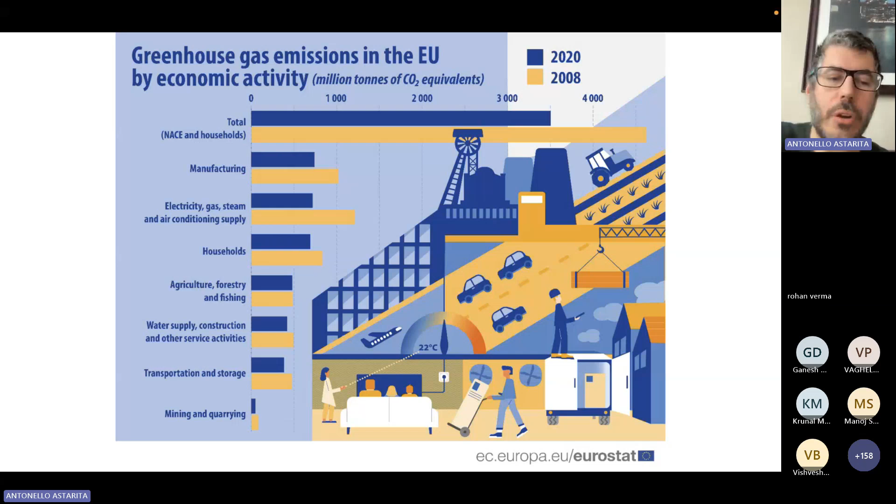So again, manufacturing is the most resource-consuming sector of our society. We consume more energy and produce more greenhouse gas emissions in manufacturing rather than in agriculture or households. So we should be very careful in performing machining and manufacturing operations. The systems I already presented to you should be considered in detail, trying to reduce the impact of those operations.

Focusing on the European Union, where does the CO2 come from? It comes from manufacturing and energy, but most of this energy is used in manufacturing. So again, most of the CO2 emissions come from manufacturing. As manufacturing engineers, we have to focus our attention on reducing the energy used for manufacturing operations, as I've shown you.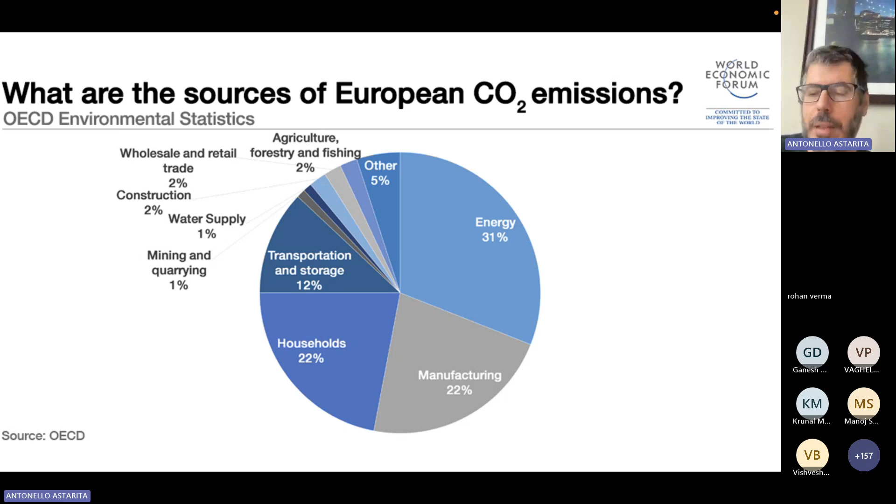Another very important point is resource productivity, a concept I would like to introduce to you: the productivity related to each kilogram of material. This index tells you how efficient your production is, how efficient you are in reducing scraps, reducing unwanted parts, and reducing defects.

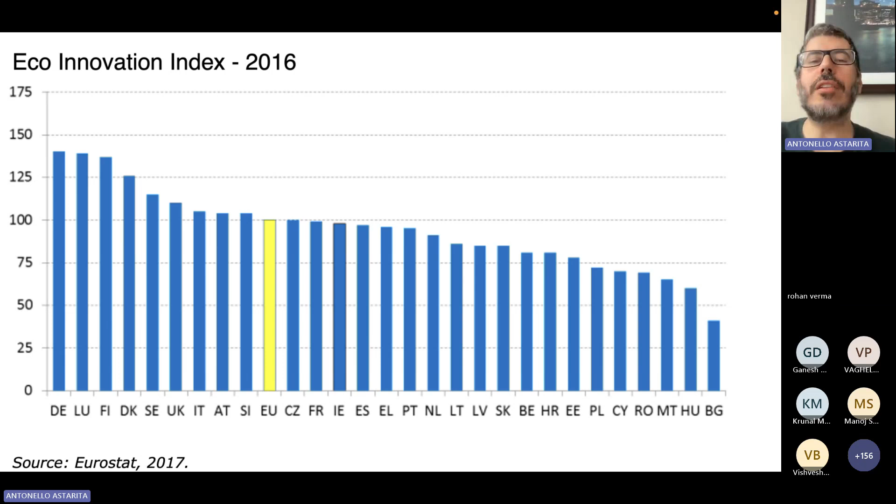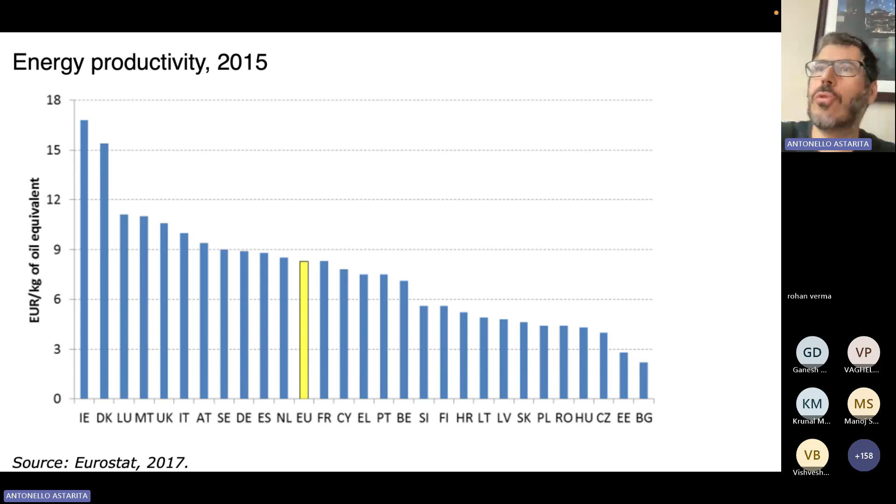All those indexes can be merged in this very important index, which is the Eco Innovation Index. Again, this index says how good you are in introducing innovation in manufacturing to reduce the impact, to enhance the energy productivity and the resource productivity. But again, from an industrial point of view, if you increase this index, what are you increasing? You are increasing the profit for your company. So this kind of metrics, resource productivity and energy productivity, are of course good for green manufacturing and for the environment, but also good for the profit of your company, because by increasing those indexes, you either reduce the environmental impact or increase the profit for your company. Don't worry, I will share with you those slides, so you will have here all the definitions of these parameters.

As manufacturing engineers, we have to pay attention to the material choice, trying to choose materials with a reduced environmental impact. We have to study the resources used in the manufacturing path. We have to study the life cycle of our product. Then we have to introduce innovation in manufacturing process and operation, trying to reduce the energy consumption. And this part, of course, is out of our competence - this is the government, the companies that release laws and regulations that, of course, we have to follow.

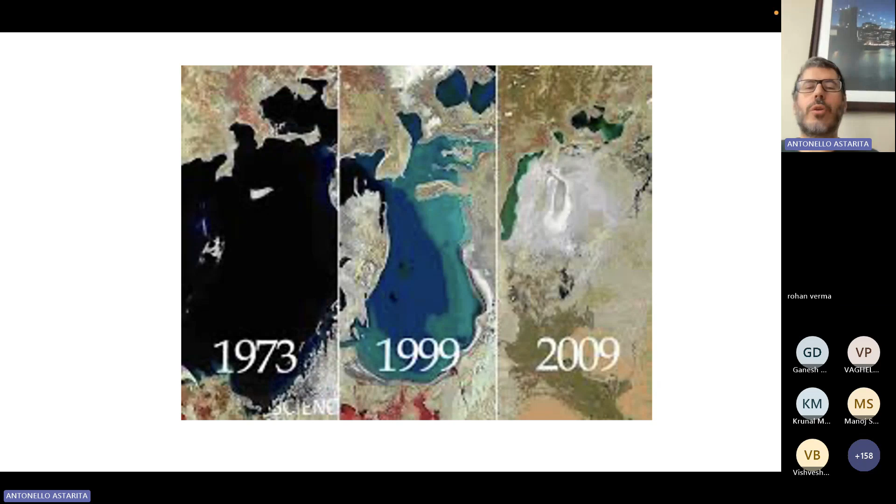This is the last image that I will show to you. This is the Aral Sea, in Russia, the previous Soviet Union. You can see the Aral Sea in 1973, and you can see the Aral Sea today. In that region, they had a very, very strong steel-making industry and they didn't follow any environmental regulation. So the final result was to have a sea in '73 and a kind of desert today. This is what happens to the environment when you carry out industrial operations not taking care of the environment. But of course, when your environment changes from here to here, it's not only bad for human health, it's also bad for the profit, because you don't have the water, you have to find water from another point. So this becomes a problem.

Okay, so this is the final part of this presentation. Yes, green manufacturing can be achieved through additive manufacturing, but you have to focus your attention on producing an additive manufacturing process which is conscious, which is based on a responsible consumption of energy and materials. So this is the last message of my intervention: to focus on green manufacturing, to think about the sustainability of the process, to think about the energy consumption.

In this direction, we are developing the equation that I shown to you. We are also doing a lot of experiments to populate this equation, trying to predict the energy consumption related to manufacturing processes. So in that way, when you are at the starting part of the production process, when you have to choose the process parameters, you can choose parameters that on one hand ensure the performance of the product that you want, and on the other hand will reduce the energy consumption, reduce the use of material, and increase the efficiency in productivity. By reducing the environmental impact, as I've shown you, you will also increase the profit for your company, which is good, because you are doing at the same time a reduction of environmental footprint by reducing the use of energy and material, but also increasing the profit by increasing the productivity by reducing the costs.